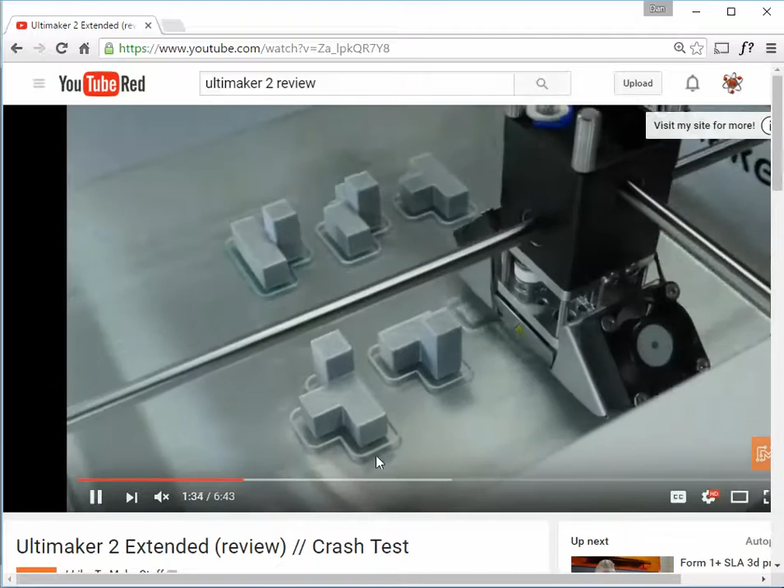Suppose I have several parts that I would like to print out on a 3D printer, in particular a model called the Ultimaker. Here's the printer in action, and you'll notice it's going to print several pieces at once. We want to be careful not to place these parts too close on the bed so the printing head does not run into the other parts during the printing process, so we're going to be very careful to do that.

The program we want to use is called Cura. To find it, look in the tools folder of Dropbox where you work for the executable to install it on your machine, or you can download Cura just by looking in Google and searching for Cura, and the word CAD will also get you there if you put those two words together.

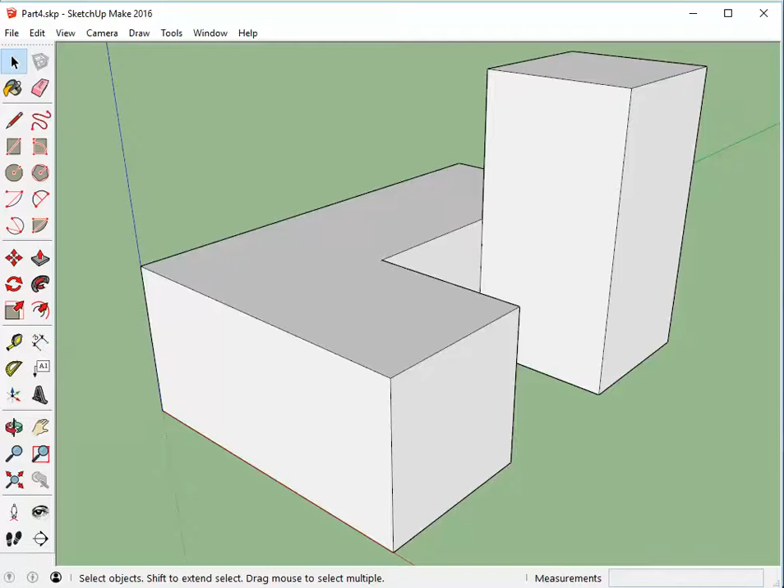Now I need to place the four parts I was showing you in Cura so that the printer tip does not run into parts it has already printed. One of the things you'll need to do first is export each one of these as an STL file. So I've already done that, exporting part number 3, part number 2, part number 1, and part number 4 as STL files.

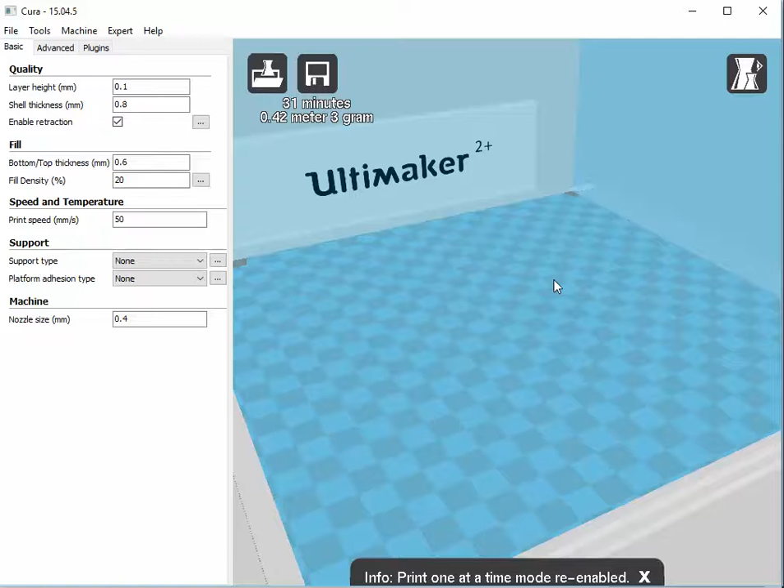Loading up Cura again, I'm going to place the four parts out here on the bed so I can print them all at one time. I'll go to File, Load Model File, and you can see I have the STL files here. If I look for all files, I can see the SketchUp files too, but here I'm just loading files that can be imported into Cura.

I can select all of them at once with Shift and click, and it places them all out in space. This might be a little too close, so I'll use my scroll wheel to scroll back and space these out. Maybe those shadows are giving us an idea of the maximum area needed to print these things. If I try to get them too close, it looks like Cura is pretty smart about not allowing the parts to get too close, which is a really good thing.

So we're going to space these out like that, and you'll notice each time it gives me a little bit of help in the placement — it's almost like playing a game. You'll also notice that up at the top it tells me how long it's going to take to print all 4 of these pieces with the settings I have.

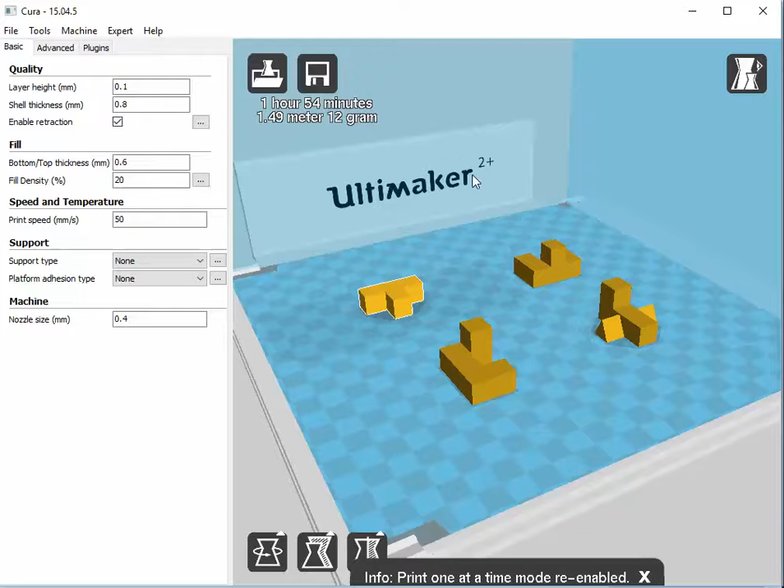When you load up Cura, it will ask you what kind of machine you have — that's a part of the process I forgot to explain — but hopefully you can notice the name of the 3D printer we're using right here. Make sure underneath it says Ultimaker 2+, then go to File and Save G-code, and put this in our same team folder. You can call this one, for example, full print, so you know it has all of it.

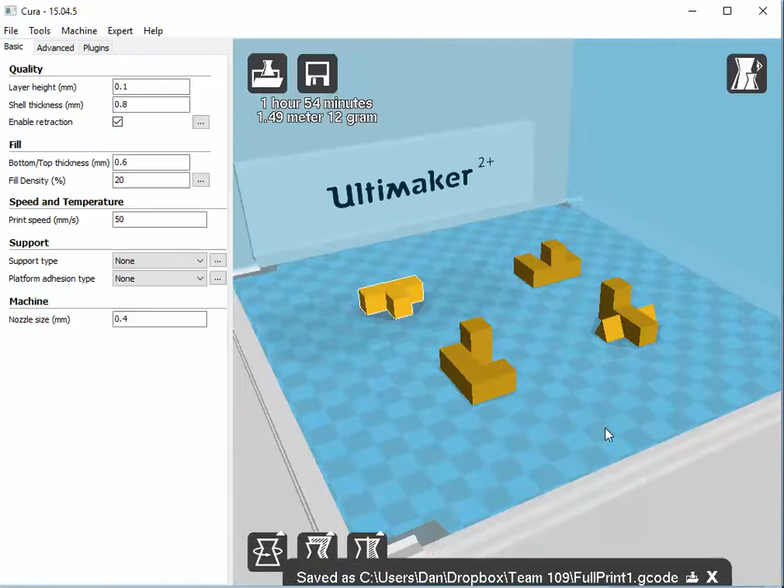This will be our first attempt, so in case we fail and need to reposition it, we can make another file called full print 2, for example. This G-code file goes on an SD card, which then goes into the front of this 3D printer. We'll go through the menu options on the wheel, select it, and it will print all of these at once, and we can come back later to check on the progress.

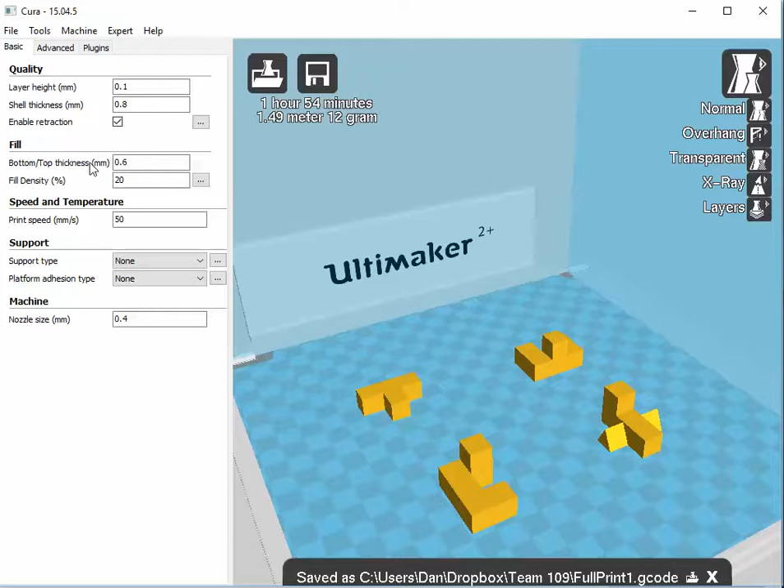Now I'm going to show you a couple of problems you might encounter and how to resolve them. I have an STL file that I intentionally made bad, and I'll show you what it looks like — you'll see this is the part, and you can see it's not to scale. I believe each one of these squares is about 1 centimeter, so this is clearly not the right size compared to these other parts.

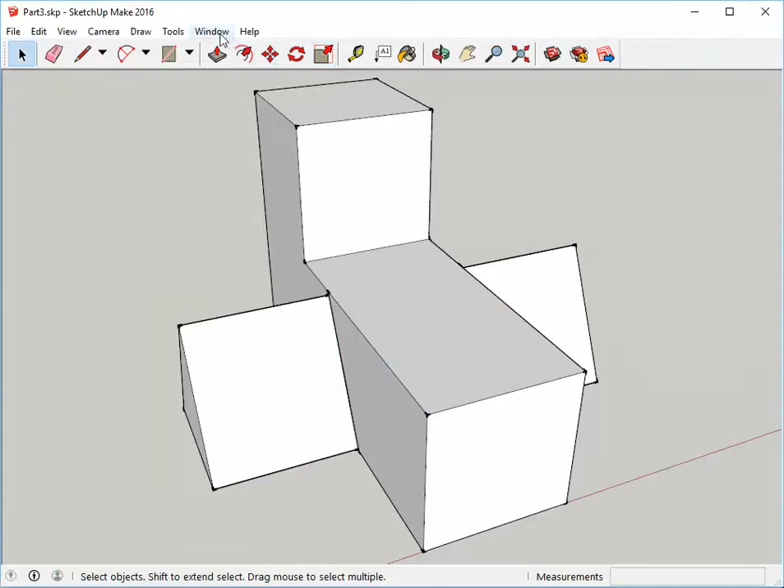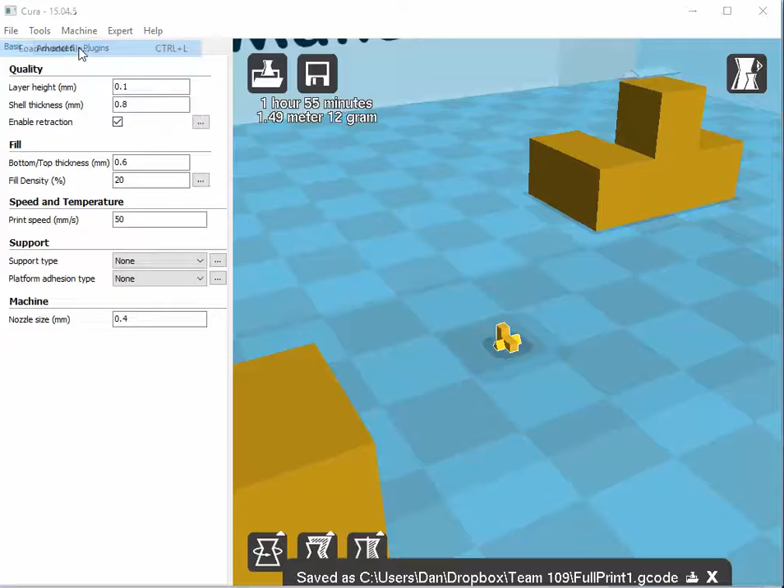The reason that happened is because when I go into SketchUp to Model Info, it was set to centimeters rather than millimeters for my dimensions. So I'm going to do the export again, and I'll call this one good to make sure I fixed it in the process, then come back to Cura, File, Load, and go to the good one. You can see there's the part here, which is identical to that one over there.

So I don't really need all of those parts like that. Let's just get these four repositioned. If you see a scaling problem, it's probably because of the model info unit settings. Make sure it says millimeters for this particular project.

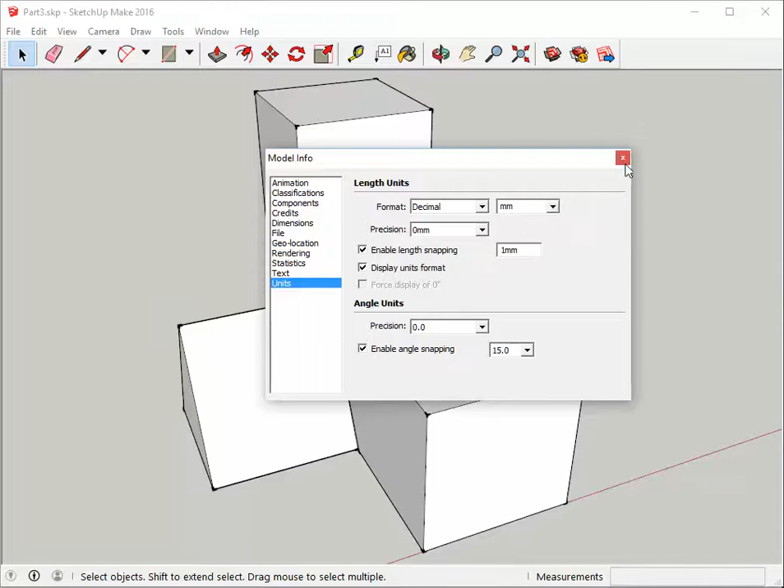Okay, I'm going to show you some other problems you might encounter. I'm going to clear the platform completely and load up another file. Here is a very well thought out design. Not only does it have the four pieces laid out in space, but it also has the composite over there for comparison so you can ensure the pieces are going together.

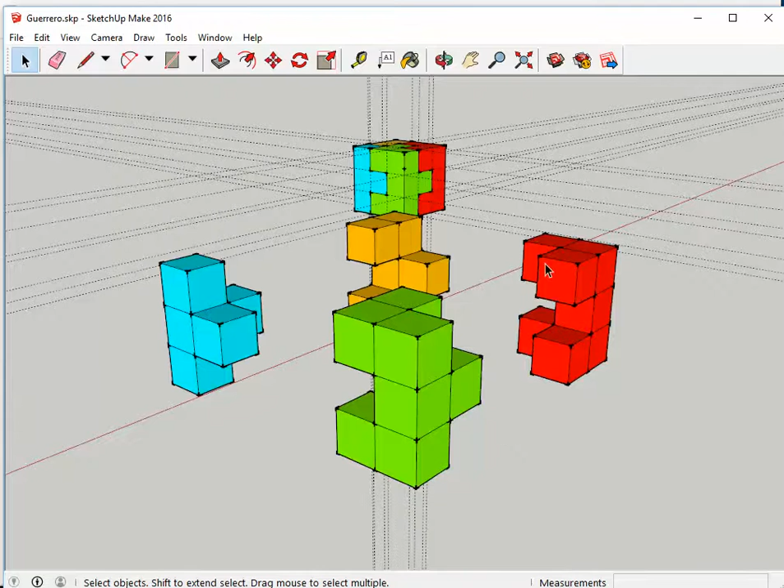But I've introduced a couple of problems into this that you might encounter so you can see how I avoided them. If I export this to an STL file and load it directly into Cura, and go to File, Load, there it is. You see that I didn't have it properly scaled, so it's way off the platform. This is not going to print.

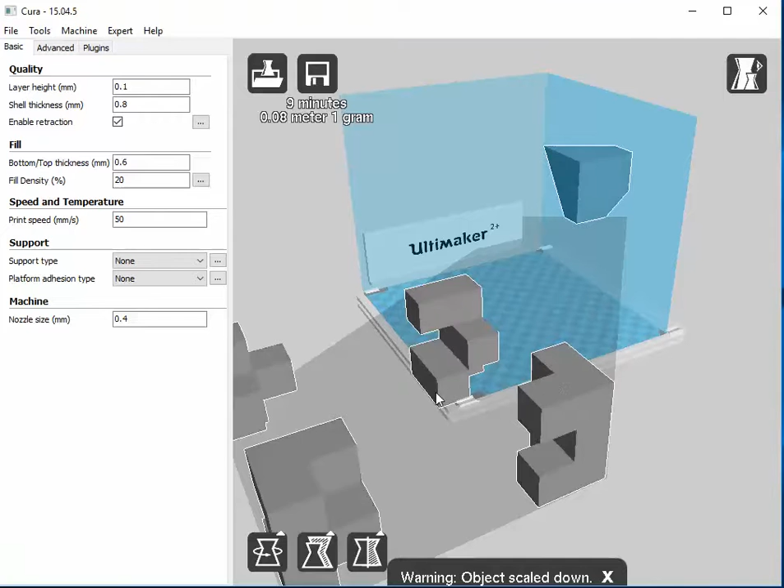Now I could try to scale it down using these scaling factors, maybe by putting an extra zero there, making it smaller. But the problem is I still have this piece over here, and they're all connected as one, so it couldn't print them out well without the tip running over the other pieces. Notice it all moves as a group.

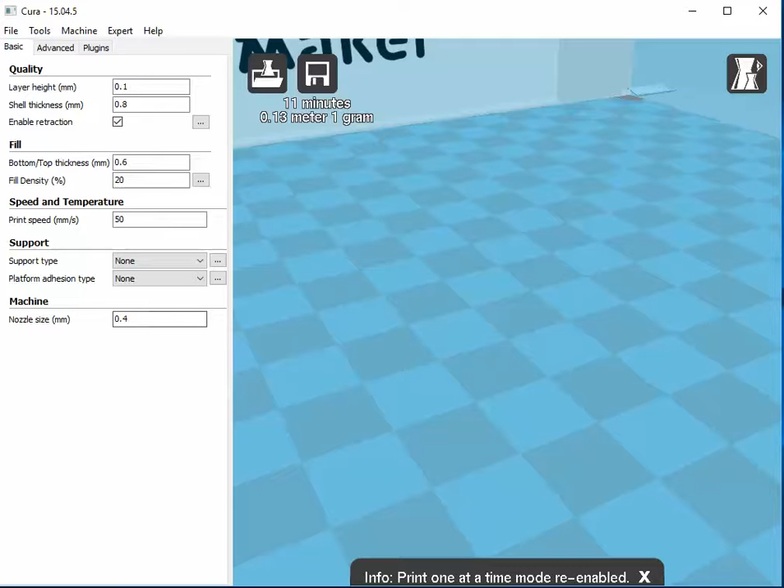So I'm going to have to do it a different way. Instead, you can ensure you have only one piece at a time. I'm going to select all of this and delete it, and focus on just this one piece right here. I'll save that as maybe part 1 or something like that.

Another thing I want to do is make sure my model info is set to millimeters. You can see I'm in architectural right now, so I need to switch it over to millimeters. I'll show you how to do that in a minute. Another problem I introduced is that if you measure one of these, I used inches instead of centimeters. This really needs to be 1 centimeter, but I used inches, and I want to show you how to correct that.

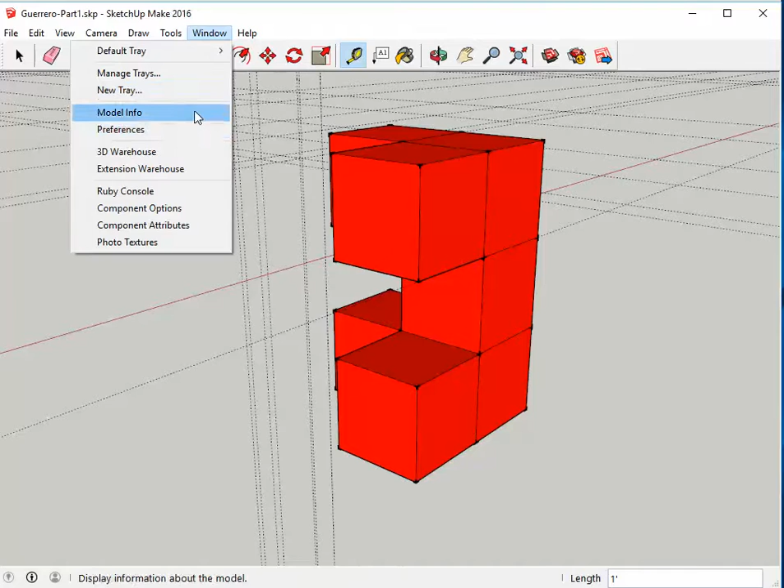So first we need to go over here and get the model info units set to decimal and millimeters. Okay, let me close that down next.

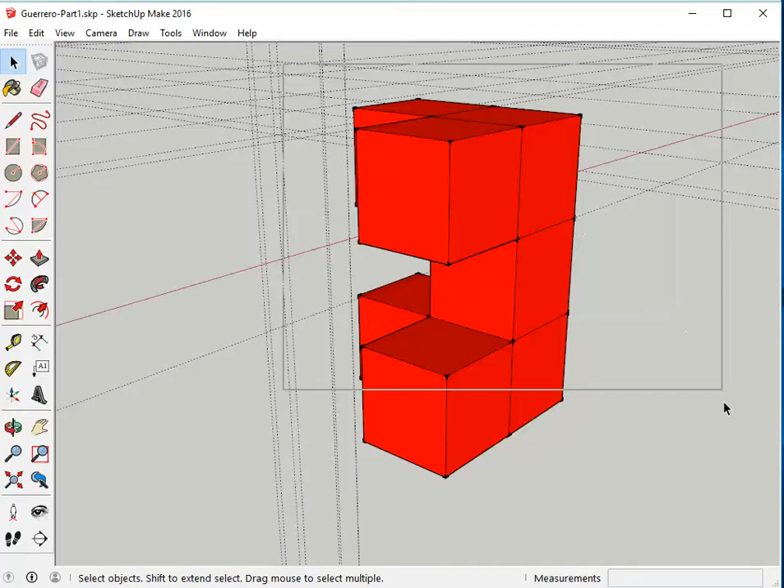What we can then do is make sure we have all the tools we need, so you might need to right click here and say large tool set. You can hide the getting started panel, and that way we can select the entire part like this and resize it.

If you rescale it, sometimes it'll squash it depending on how you grab it. I think if you grab this one, it squashes it in the wrong direction. Perhaps if you grab it in the corner, that's the ideal thing to do.

Now remember that what I have here is 3 inches, and I really need it to be 3 centimeters. So I need to convert from inches to millimeters. One inch equals 25.4, so my scaling factor that I need to type down here needs to be 0.3937.

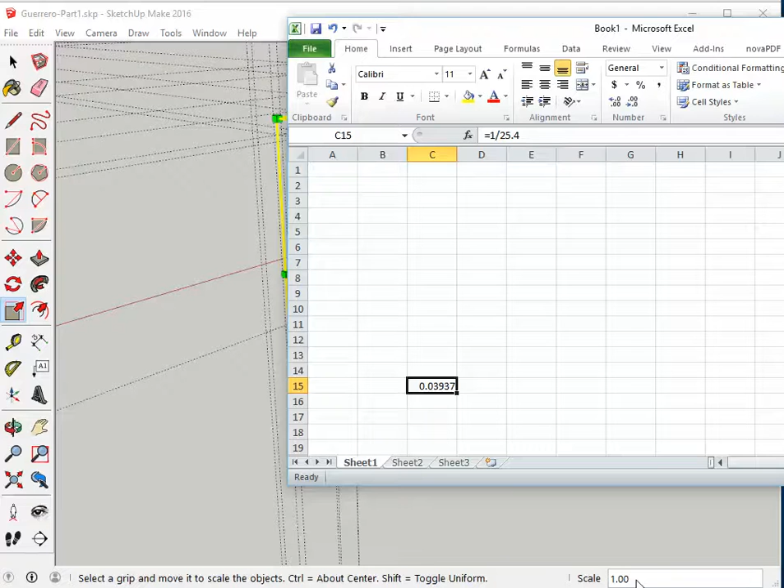And it made it a smaller piece, which is a good thing. I guess I can use this tool to center it up. Let's make sure it's going to work. Export, let's try this again.

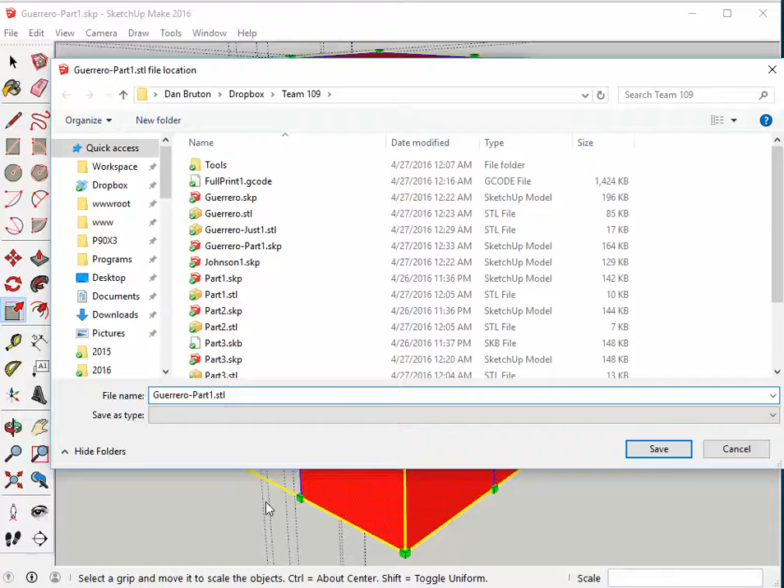This time we're going to call it B, just to show it's a different file, and see how this imports into Cura. Load, and that's my part B.

And I obviously didn't do something right. That's going to take probably more than 11 minutes to print. I'm going to pause the video and go back and see what I did wrong.

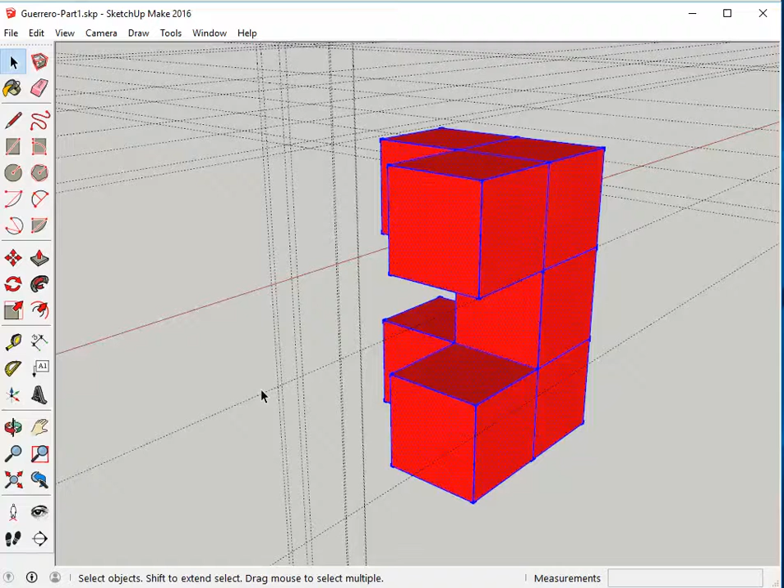Okay, so I've taken it all the way back to the point where I had the unscaled image, where this is 3 inches and I need to make it 3 centimeters. I'm going to try that again: 0.03937, and then it made it much smaller.

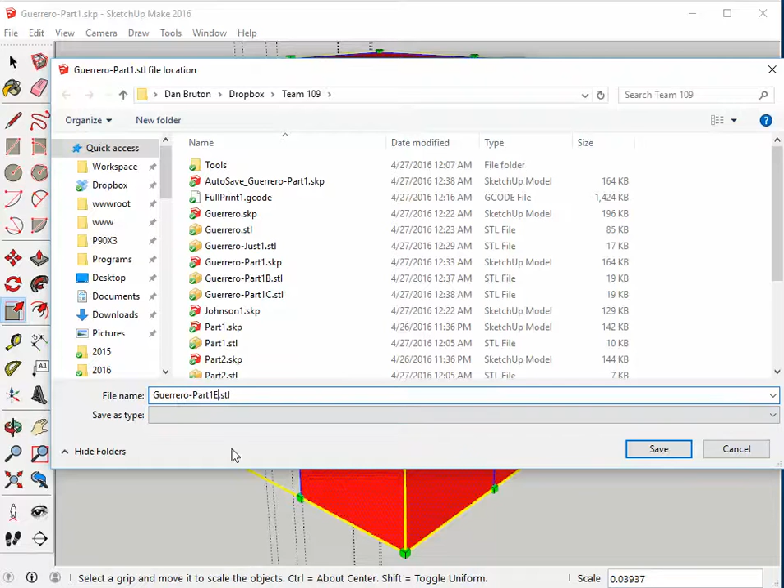Then going into model info and setting decimal, millimeters, export, and I'm going to call this part E, or my attempt E rather, and load this in to see if it's a little bit better. So you check all the parameters until it looks reasonable.

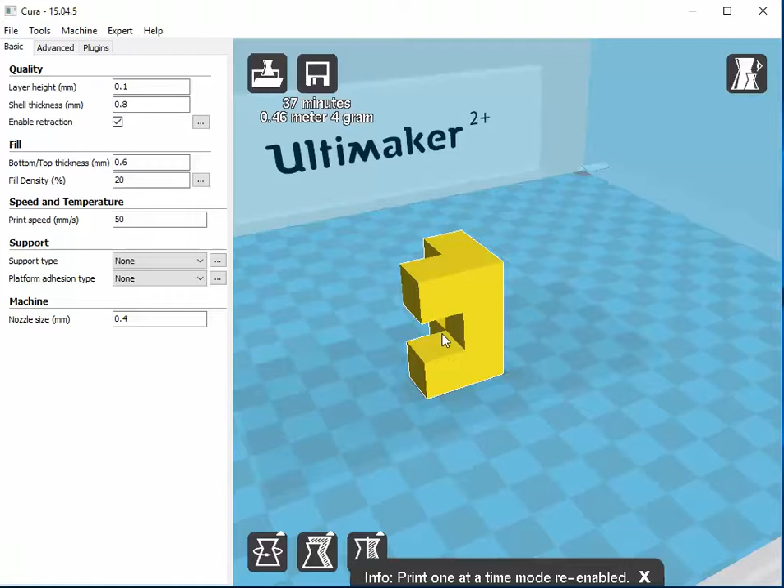One last thing we need to look at is the orientation of the print. This part won't be able to print like this because it'll try to print the material, which is kind of fluid, and there's nothing to support it. So instead, what we're going to do is rotate this part.

You can go down here to rotate, and you'll see these three axes appear. I'm going to grab this axis and rotate it around, and notice it says 90 degrees when I stopped. I might grab this one and rotate around to take a closer look. You can see now this is going to print without any overhangs at all, and that's really the way we want to do it.

So we can go ahead and place this part and bring in the other three parts until we get everything set up here. I'm not really sure I scaled that properly still, because it's taken 27 minutes to print, which seems a bit long.

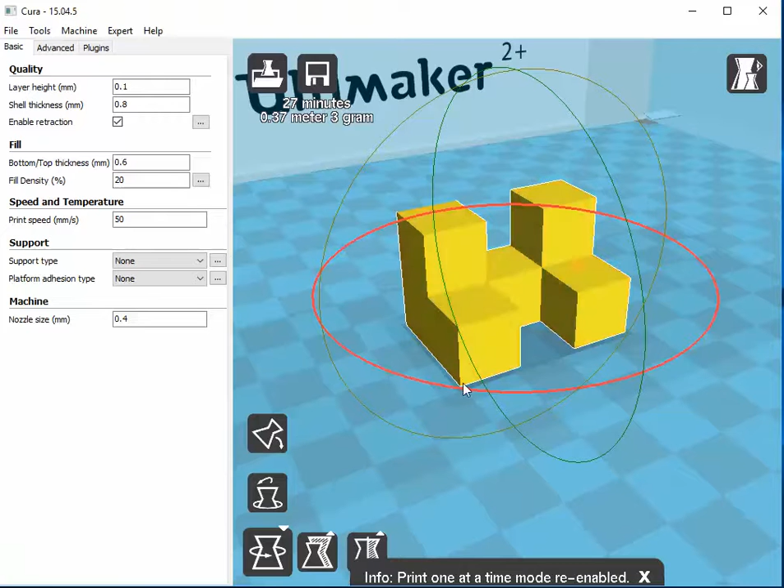Also, if this is 3 centimeters right here, I don't think I really got this the right shape. I certainly don't want to print it tilted up like that either. So I have to go back to the drawing board, check everything out until you get the part scaled and positioned properly for the print. All right, hope this helps.